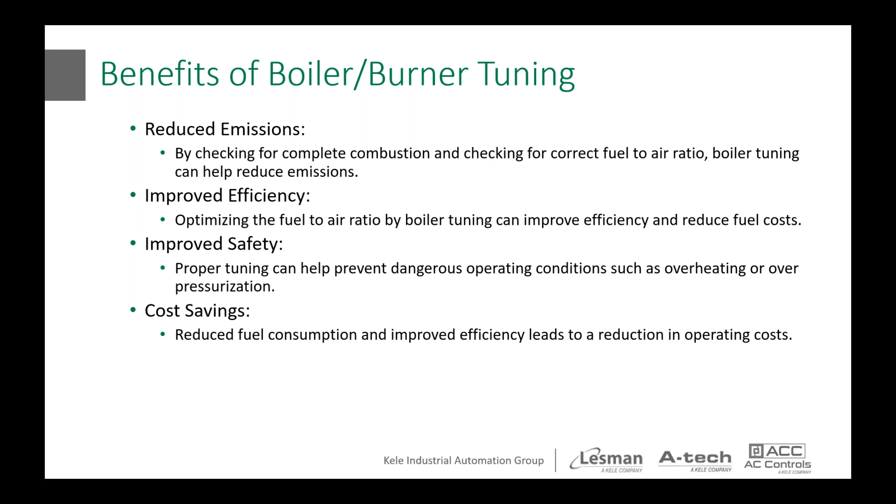So this is a typical answer in this world, as we would recommend, especially on your larger boilers, larger process heat burners: having them tuned, or at least checked to make sure they're still in tune, twice a year. And that's typically done in the spring and in the fall. And the main reason for that is

because of temperature changes. What happens is the temperatures change outside, the air densities change, and that can greatly affect the fuel to air ratio. So a lot of times, depending on where this equipment is, it could be located outside, and that has a great effect when we have temperature swings, air density. As the air gets colder, the air is much more dense, so it's putting more oxygen into your equipment, and that can throw your fuel air ratio way off, end up with excess air, which then leads to much lower efficiencies.

We just talked about what can actually affect your boiler or your burner combustion. The environment, atmospheric changes, that's one of the largest things. But another thing that is happening, especially where we live in the Southeast, is construction. There are plant expansions, there's building going on everywhere. And what we end up seeing is our techs might be in one year, and then they might come back six months or a year later and find out that one of our customers might have added additional equipment, either inside the building or beside a boiler that's outside.

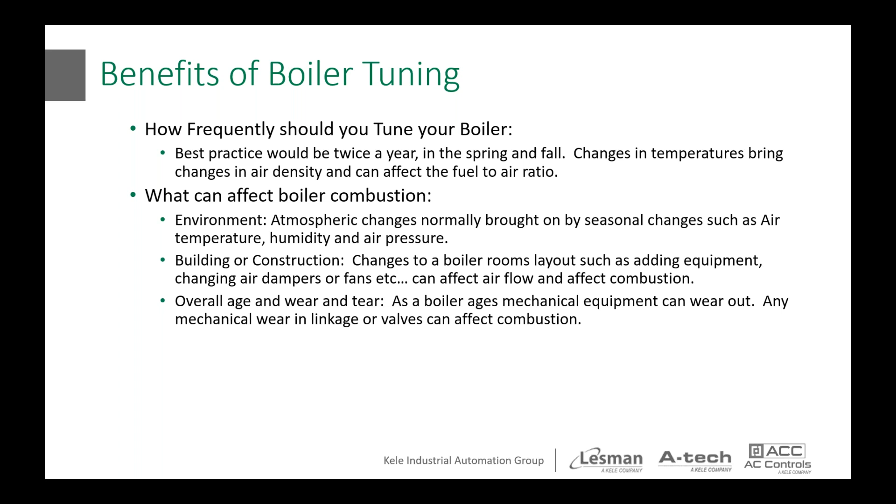So as we talk through the different boilers, I don't really know the people that are on the call and how much experience you have working out in a plant, or, even if you don't work in a plant, walking by a piece of equipment and understanding what it actually is. So we're going to talk a little bit about a couple different style boilers, the most common styles out there, some of your process burners, and what kind of applications they could be in.

The first one is a standard fire tube boiler. This example is a Cleaver Brooks boiler. They're one of the larger manufacturers in the country. These are very common in industrial manufacturing plants, hospitals, universities. They're typically used for lower pressure steam in an application where you need up to maybe 150 pounds, up to 200 pounds total of steam pressure for whatever the requirements of your plant's steam load are.

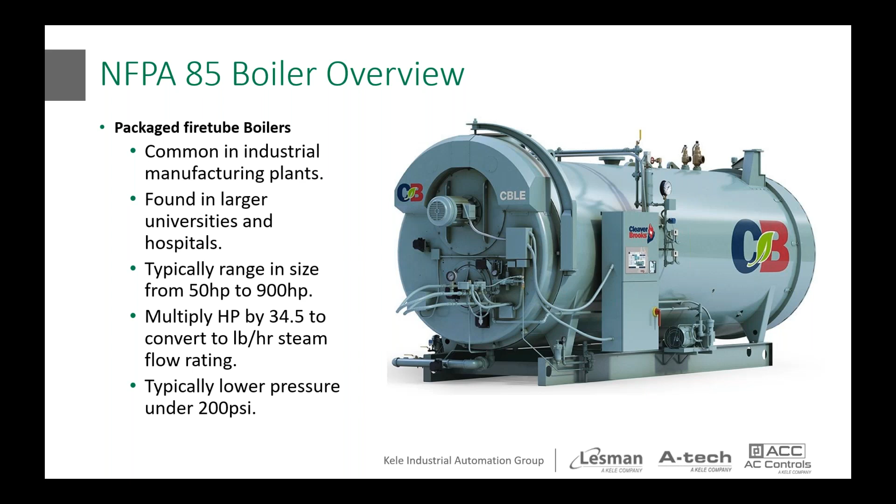And they are typically sized in horsepower. As a process guy looking at it, you see a horsepower number for a boiler, and a boiler is producing steam or hot water. So one of the quick and easy conversions, if you have a fire tube boiler, is you can multiply the boiler horsepower times 34.5 to convert that into pounds of steam per hour. That helps with knowing what the steam flow of that actual boiler is.

The next style boiler is a water tube boiler. These can be found in a lot of the same locations, manufacturing plants. Typically, these are used when you need a higher pressure or more capacity at your plant.

And these boilers, a typical packaged water tube boiler would be in the 30,000 pounds of steam per hour to maybe 100,000 pounds. There are plenty of packaged 150,000 pound boilers. And these are typically used in an application where you would need maybe a little bit higher pressure or more capacity. And that would be 100 to 500 pounds.

And this is kind of the world that we're in over on the AC technical services side. This is where we work a lot, in the larger packaged boilers on the controls end. And then a lot of these larger water tube boilers at hospitals, universities, larger places that need multiple boilers with larger distribution loops. They might be heating multiple buildings.

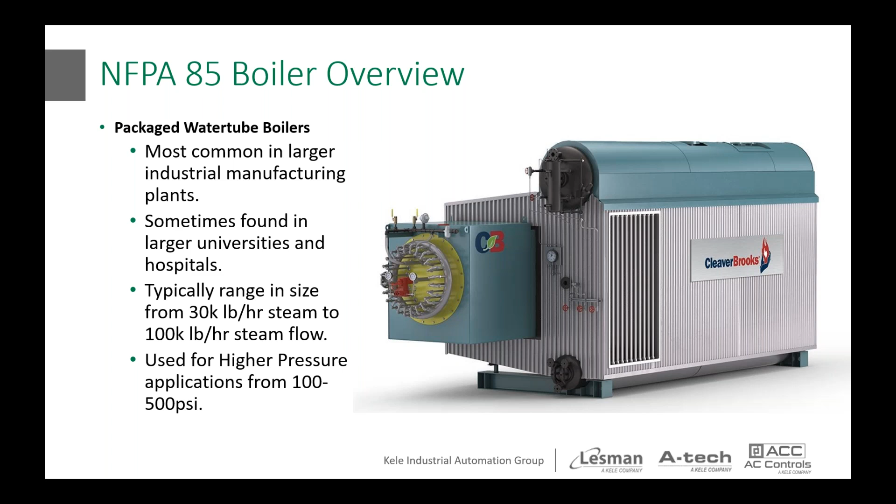And then the last one is kind of what we're talking about with the process burners. So when you say process burner, they range from small little 500,000 BTU, million BTU burners that are just heating air. They might be used on a makeup air unit on top of your building, and it might be a 5 million BTU burner that's just helping to heat the building. Most of those would be natural gas.

But then also, we do a lot on the process heating, heat treat applications. And so these would be used for metal heat treating, ceramics, multiple different applications out there. And most of these are natural gas fired. You do see some electric, but most of these are natural gas fired. And we can get into some of these larger kilns, rotary kiln style at maybe a paper mill, or you can get into 100 million, 200 million, 250 million BTUs an hour. They get into some really big burners, really large users of fuel.

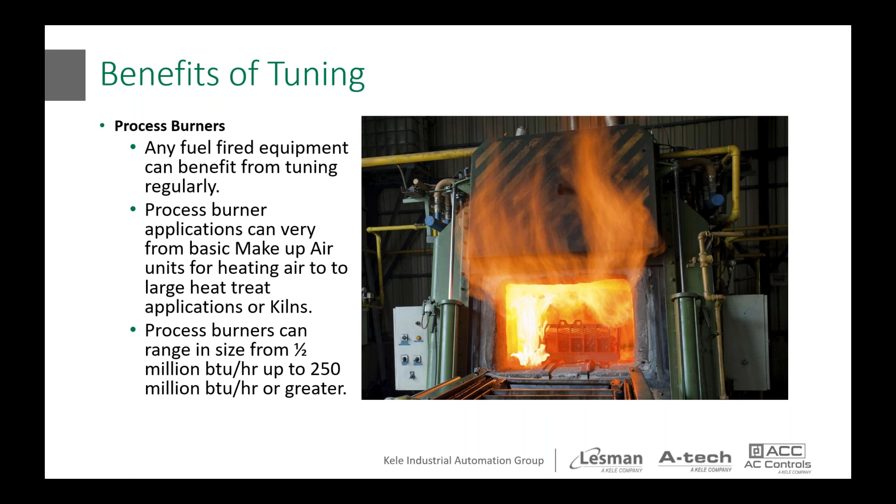So the next part we're going to talk about is just getting an idea on how the excess air and the oxygen content in your stack correlate. And then we're going to talk through a couple real world examples of how this can actually save you some money.

So when we talk about excess air, that is basically extra air that is leaving in the exhaust that is not really needed for a stoichiometric ratio of fuel to air. So typically when we're talking about natural gas, that's a 10-to-1 ratio, 10 parts air, one part fuel. So as we talk about excess air or the oxygen content in the stack, they are directly connected. They are related.

So in the examples we're going to use, we can get a real idea on efficiencies just with a boiler using a stack gas analyzer. And that's typically how we do a tuning on a boiler itself. So we would have a piece of equipment that measures O2, CO typically, and then a lot of times other emissions, which would maybe be CO2, NOx, and some other things, SO2.

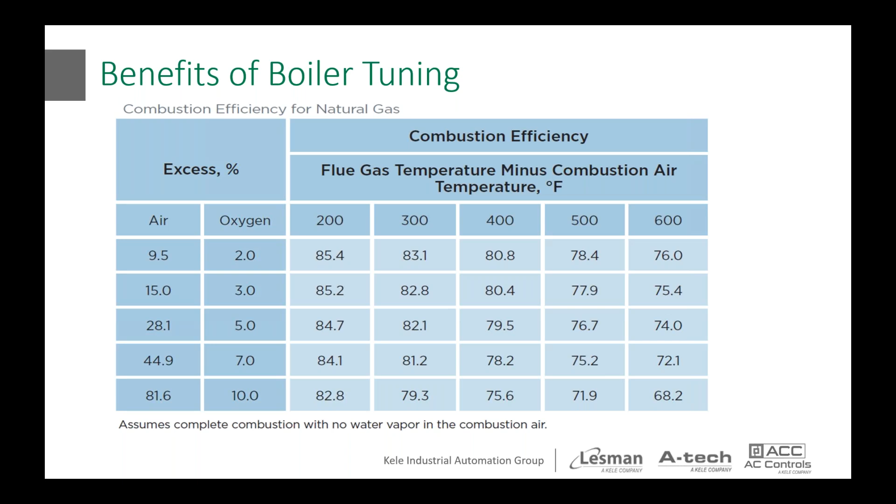So what we're going to talk about are some real world examples. These are some numbers that I pulled together, and it's basically a 2500 horsepower fire tube boiler, which is a medium size, pretty average out there. Ran some numbers with this, and this is just a single boiler. So we look at some of the operating parameters, and this would just be maybe a 125-pound boiler. If we look at the stack temperatures, a 450-degree stack temperature, which is a pretty average number for a lot of these boilers that we look at.

We look at boiler excess air, and this is kind of an as-found example of something typical that one of our techs would walk into. As he's getting ready to do a tuning, he would check and document all the as-found numbers beforehand. And this would be very, very typical.

And we kind of base these calculations on just a 50% average load of the boiler. It's running about 50 weeks a year, and it's running about 16 hours a day. And that's just kind of good average numbers for a process boiler like this in a manufacturing plant.

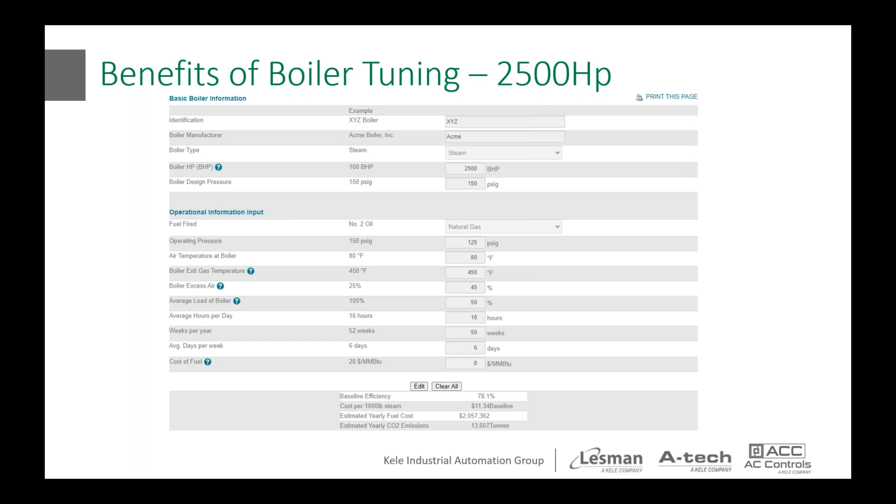So if we look at walking in and you have a stack gas analysis and we're looking at around 7% oxygen content or 45% excess air, we're able to drop that down to 15% excess air, which is in the 3% O2 range. And like I said before, that would be from around 30%, 40% firing rate throughout the max range of that boiler. That could potentially save $43,000 a year just in fuel costs.

You also look at, even below on this calculator, it shows estimated yearly CO2 emissions. Those are some pretty big numbers, especially when you're looking at your emission savings. Any kind of credits, green credits that are out there, it's a pretty big number. But just being able to, with a day's tuning for a natural gas fired boiler, see that kind of savings within a year, that's a pretty big thing.

So I think that's all I really have on the tuning portion of it. AJ, do we have any questions?

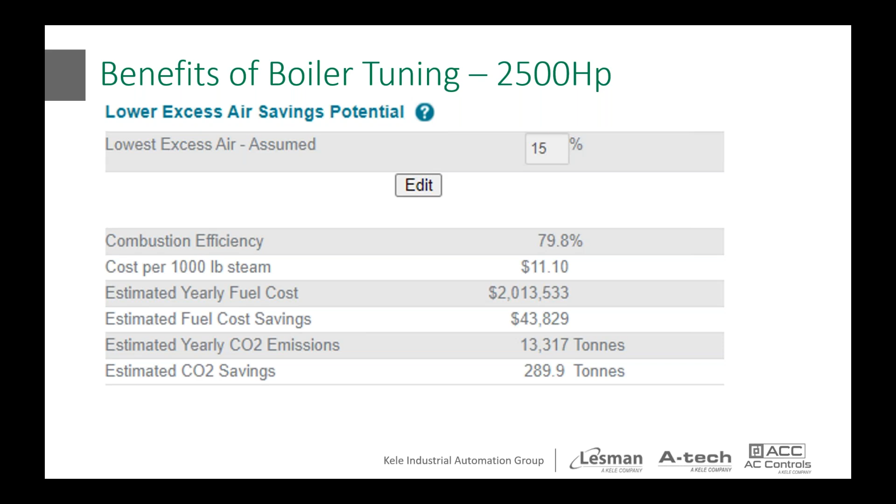And actually, wait, Jason does have one more question before we jump into this. What is the average life of a boiler? A lot of that is based on maintenance programs. There's 2 main things that really affect the life of a boiler. Water treatment is one of the largest ones. So you need to have good clean water, good soft water.

That's what your deaerator tanks are for, is to get the oxygen as much as possible out of the water. And then water softeners really help with that scale buildup on the inside. So water treatment is probably the #1 thing. And then on the combustion side, tuning, just to make sure that, depending on the style of the boiler, you're not sooting up the inside.

What ends up happening with bad water treatment is on, just say, a water tube boiler, you end up building scale up on the inside of the tubes, and that decreases efficiencies. And so you have to put more and more heat to get that heat transfer to produce hot water or produce steam. And fire tube boilers are very similar. They just build up scale on the outside of the tubes.

I don't see any other questions, so I think we'll gavel this. Oh wait, and just as I say that, Jason comes through with another one.

All right, does an electric boiler require tuning? We have been getting a push to possibly go the electric boiler route. So that's a great question. It does not really. We have a couple customers that in the past had electric boilers. I cannot think of anyone right now that has one that's in operation. But there would not be any combustion tuning because it's just a big, huge water heater or a big electric heater.

It's probably as much or more reliant on good, clean water. The electric boilers are typically very fast to heat up and cool down, so water treatment would be a huge, huge priority with an electric boiler. They're also, on the larger scale, a massive, massive amount of electricity. We had a hospital probably 15 years ago that put one in, and it required a separate substation just for the electric boiler.

Okay. All right. Jason, do you have another one, or does anybody else on the call have any other questions for Brian or I?